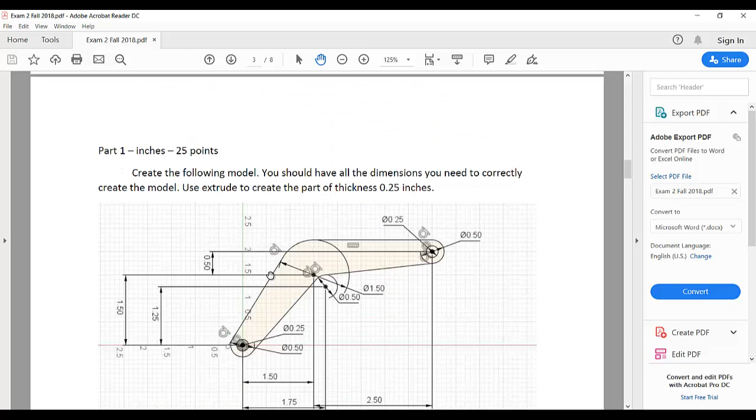So we go to part 1. Units are in inches, and it's worth 25 points. Here is the view of part 1. We need to create this design in Fusion 360.

This is part 1, the main arm, and this is part 2. Create the following model - you should have all the dimensions and create the model correctly.

So this is part 2, the secondary arm, and then there is a base. Part 3 is base, and after designing the base and saving it in Fusion 360, we will do parts 4 and 5. Create 2 pins that will be used to hold the main arm to the base and the secondary arm.

So this is the base, this is the main arm, and this is the secondary arm, and there are 2 pins. Pin 1 is here, and this is pin 2. We need to find these dimensions for these 2 pins. We can do it - first I'm going to design part 1, which is the main arm.

First thing is that verify your units. Change the units into inches. Click OK. Now the units are converted into inches.

Go to create, and I am going to select this front plane. As you see, this is the drawing. There is a circle here, then this line, then again a circle, then a line - this type of sketch we need. So I am going to draw this sketch, and then after that I will give the dimensions to it.

I am going to select circle, draw a circle like that, then again another circle like that, and I am going to select line, start the line on that circle and place it here anywhere you want, and the second line must touch this circle. Again this way I am going to select a line like that, and then give the dimension to this circle.

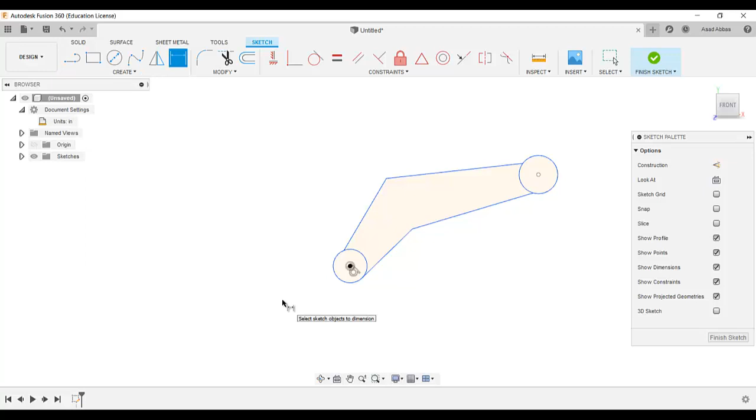Now I am going to select the sketch dimension to dimension this. The diameter is given as 0.5, and this diameter is also 0.5. Okay, and now I am going to add some constraints.

Select the tangent constraint and select this line and this circle, and again this line and this circle, and again I am going to select this line and this circle, and this line and this circle.

Now I'm going to go to modify and add 2 fillets. I'm going to select this one and this one. These 2 fillets we need to add, and the dimensions of these fillets are given.

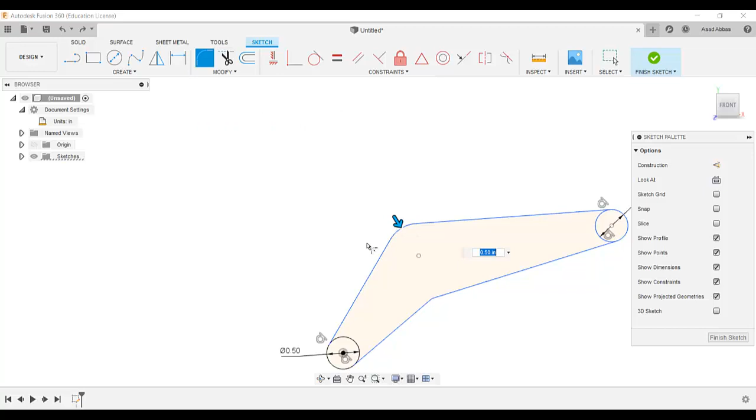This dimension is given as 1.5, and this sketch dimension - sorry, we need to select the fillet command and add a fillet here. Click OK. This is showing in radius, so we need to change it into diameter.

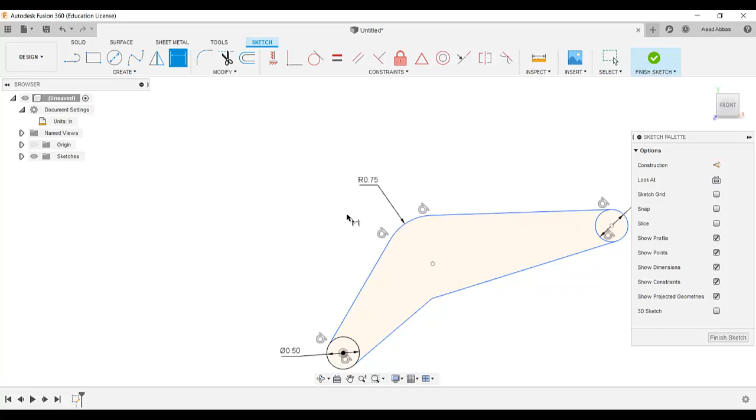Go to sketch dimension - this dimension is showing in radius form, so we need to add 0.75, and now we need to change that into diametral dimension. So go here on this dimension, select it, and then toggle to diameter. Now this dimension is converted into diameter.

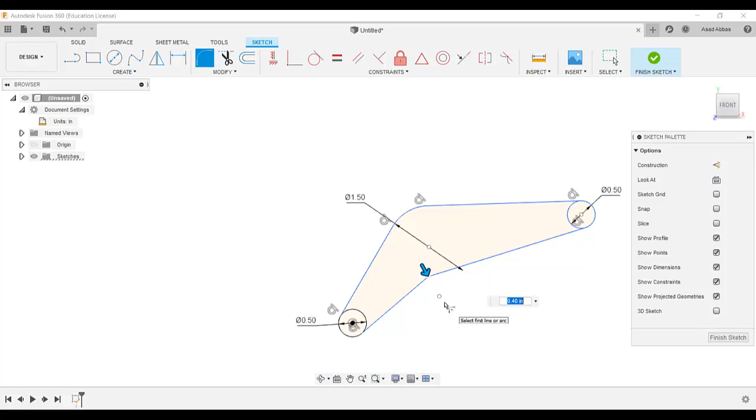Again, the same way, I am going to add a fillet here and put the dimension 0.25 in radius form, but this dimension we need in diameter. So I go here, click on it, then right click and toggle into diameter.

Now I am going to add some position dimensions. The dimensions are given here: from this point to this, and this point to this, this center point from this origin is 1.25, and this is 1.5, and from here to this center it's 1.5, from here to here it's 1.75, and this one from here to here is 2.5.

This dimension I'm going to add - from this origin, this center to this center, in vertical form, this dimension is given as 1.25. And this dimension, the center of this circle, select this point and this center, this dimension is given as 1.5.

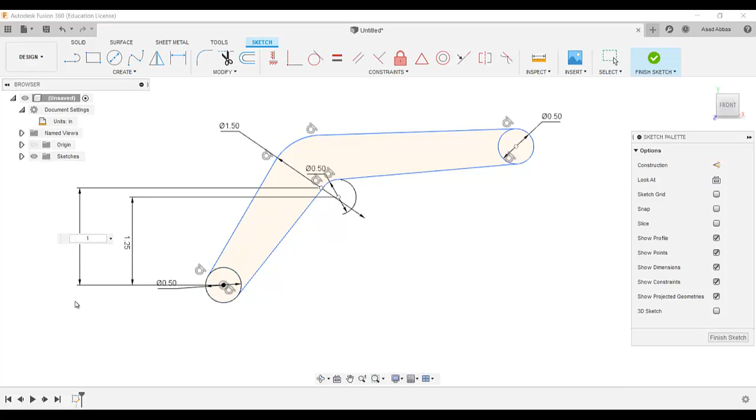From here to this center, this dimension is 1.75, and from here to here, this dimension is 1.5. Now from this point to this center of that circle, sketch dimension, select this point, and this dimension is given as 2.5.

From this center to this center it's given as 0.5. Select this one, this is given as 0.5. Now we need to add two more circles, select this, and this dimension is 0.25, and again the dimension of the circle is 0.25.

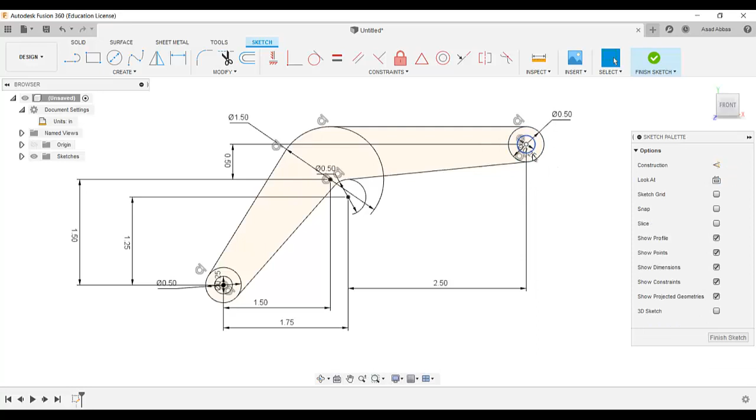We can add dimension when we're drawing the circle, or if you just draw it, we can add it by the sketch dimension. Now I am going to trim this area and this one, this area we don't need, so just select trim and go into that area and it will be trimmed, and finish the sketching.

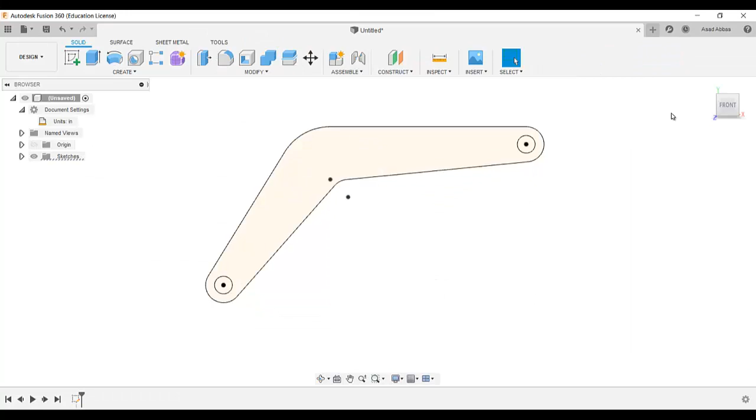To correctly use the extrude to create the part of thickness 0.25, extrude it, and its thickness is 0.25. This is the main arm. We just created the first model, and as you see, its thickness is 0.25. We needed that thickness when we calculate the length of pin 1.

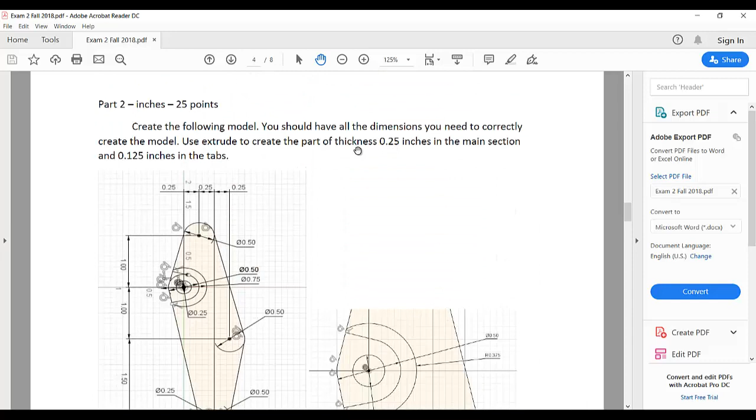The second part is to create the following model. You should have all the dimensions you need to correctly create the model. Use extrude to create the part of thickness 0.25 inches in the main section and 0.125 inches in the tabs. These tabs, their thickness is given as 0.125, and the thickness of the main part is 0.25, and there are two tabs.

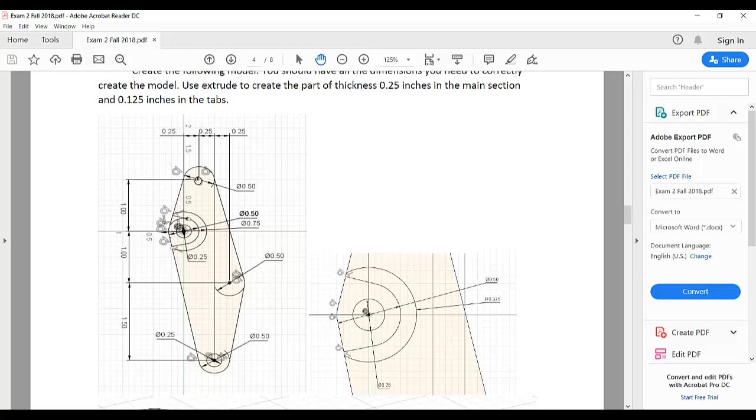The thickness of the tabs is 0.125, and as you see, for this part there is no material here. The tabs are on the upper surface and the bottom surface, and between the tabs there is no material. So this is the sketch of the secondary arm. I'm just enlarging it so you can see it.

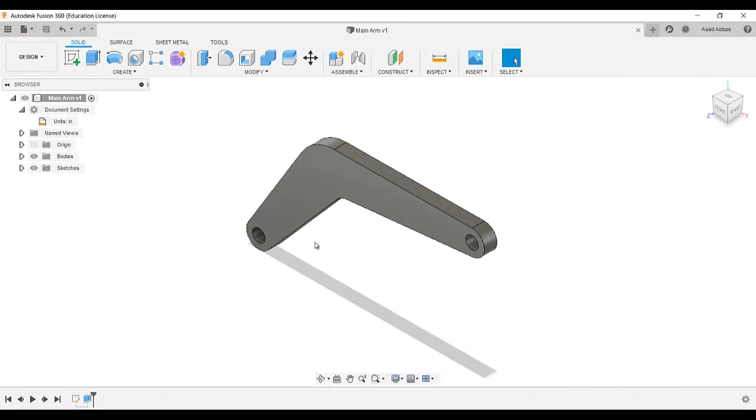Here the drawings of the tabs are given. As you see, the drawing of the tab is given here, so we need to draw like that. First I'm going to draw the main part or feature of this secondary arm, then I'm going to draw this stuff. So I just saved that part one.

First thing is go to units, change the units to inches, click OK, create, and we open this sketch on the front plane.

For this sketch I am just going to draw 4 circles, placed like that, this way. Just randomly draw these 4 circles, but make sure you draw something like that. As you see in the drawings, there is a circle here, here, here, and a bigger circle here. I'm just going to draw it like it's showing me in the sketch. So I just randomly draw 4 circles.

Now I'm going to add the dimensions. This point is the point of this circle. There is a circle here, if you enlarge it you can see it, but the other part is trimmed, so that's why it's not showing a full circle. As you see closely, there is a circle here, and the dimension of each circle we need is 0.5, 0.5, and here it's also 0.5.

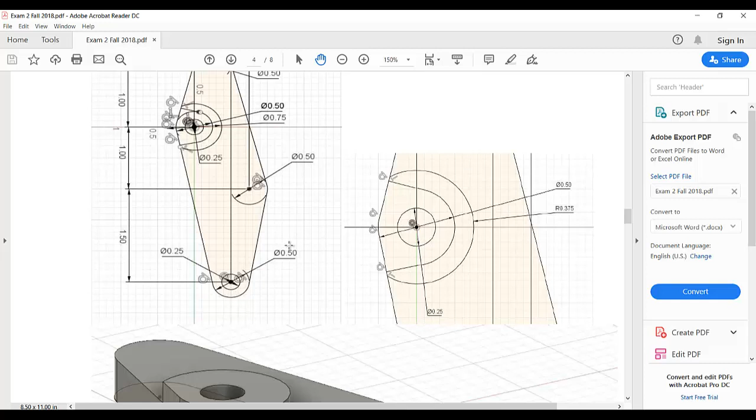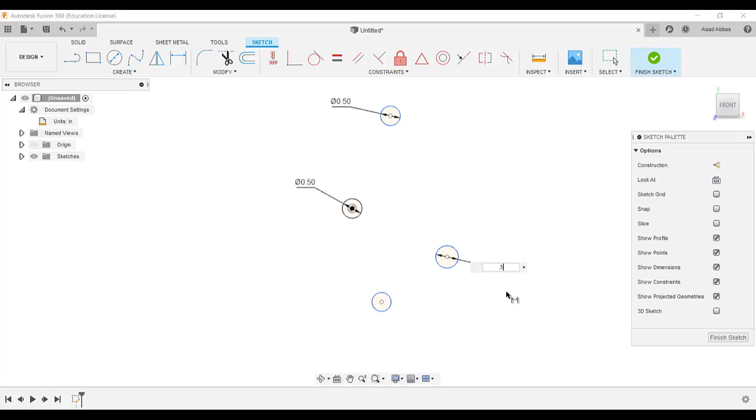Draw it and go to sketch dimension and dimension it. So this dimension is given as 0.5. This is also given as 0.5. This is also given as 0.5. This is also given as 0.5.

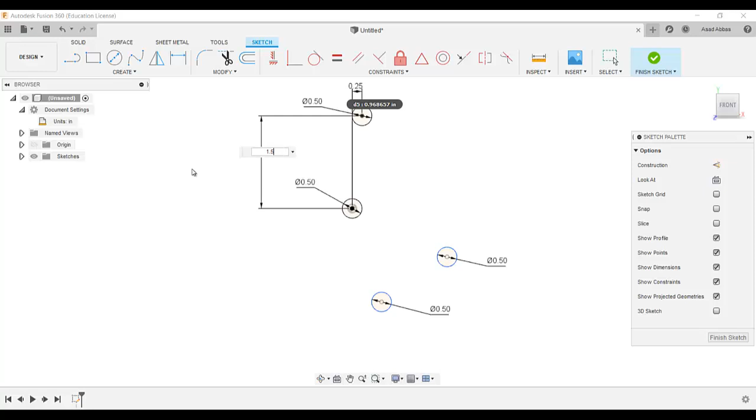So if you see from here to here, this dimension is given as 0.25, and from this point to this point, this dimension is given as 1.5, sorry, 1.

For this circle, from this point to this point, this dimension is also given as 0.5, and from this point to this point in the upward horizontal dimension, this is also 0.25, and from here to here this dimension is given as 1, and from here to here in a vertical form, this dimension is given as 1.5. So we just drew these 4 circles and gave the dimension to each circle.

Now select the line tool and draw the line from here to here. Draw a line from here to here. Draw a line from here to here. Draw a line from here to here. So we just drew these 4 lines, but I avoided adding the constraints here when I'm sketching these lines.

Now I'm going to add the tangent relation. Select this line and this circle, add a tangent. Repeat this for each line and circle combination around the sketch. So we just drew these 4 circles, gave them dimensions, added the lines, and added the tangent relation between each line and each circle.

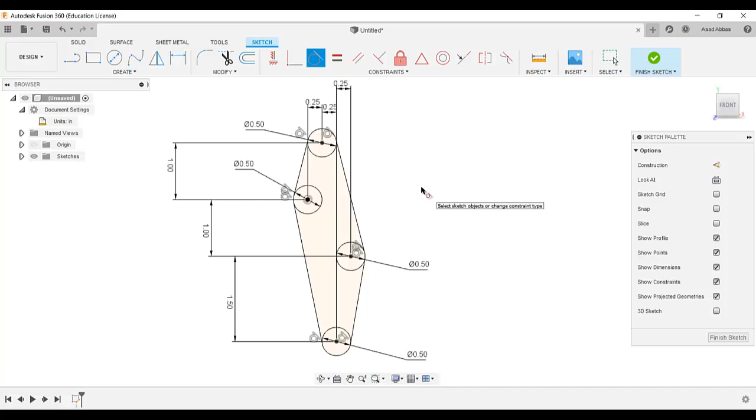So the final sketch will look like that. Now I am going to use the trim tool to remove this portion, this portion, this portion, and this portion. And I am going to select a circle here, draw a circle, and give it the dimension 0.25.

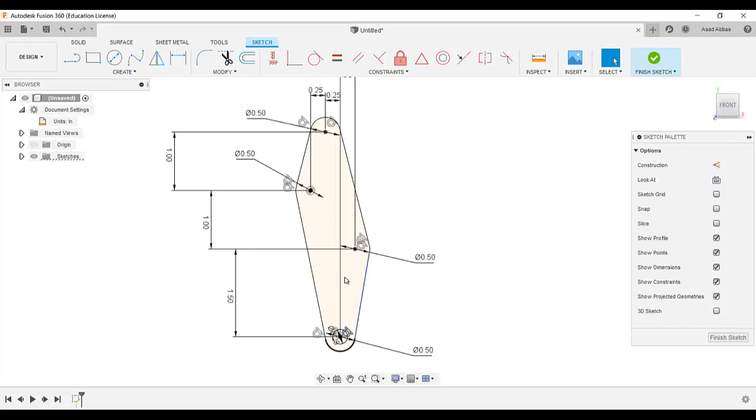We just drew this circle here, but in coming features we also need a hole here and here. So I drew a circle here which will make the hole, but I did not draw it like the circle here, so we can do it later and finish it.

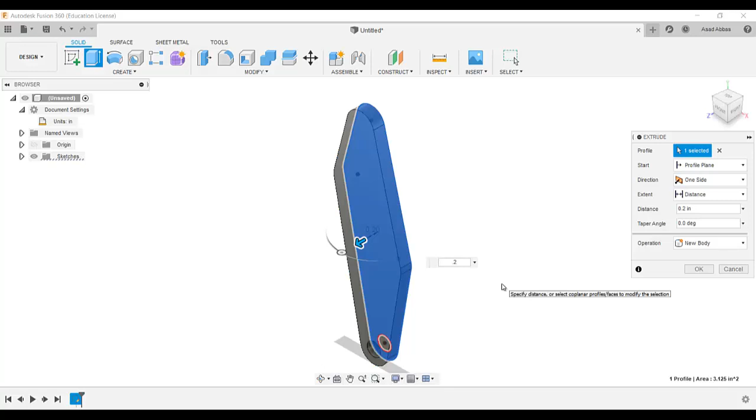And then go here and extrude it. This is given as 0.2, the thickness of this extrusion is 0.2. So we just drew it.

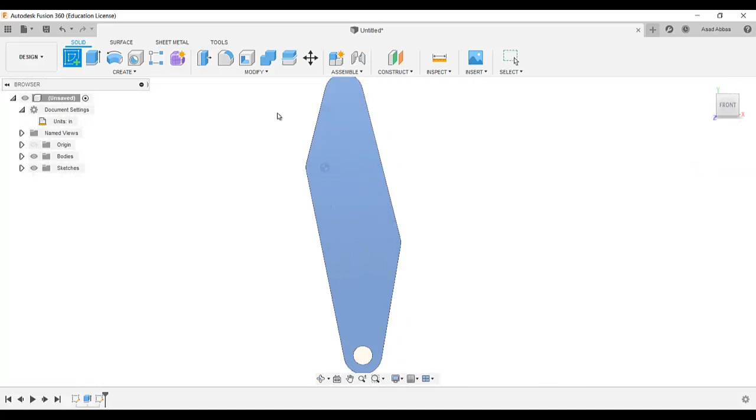Now we need to remove the material from here and add these two tabs. Look closely and observe how I am going to add it. So create the sketch on this surface, like that. Just zoom in, so this portion near the origin is in a larger shape. So we just draw this sketch.

There is a circle here with radius 0.375, and there is a circle here with diameter 0.5, and this circle is showing the diameter of the hole. So draw a circle like that, just draw these two circles.

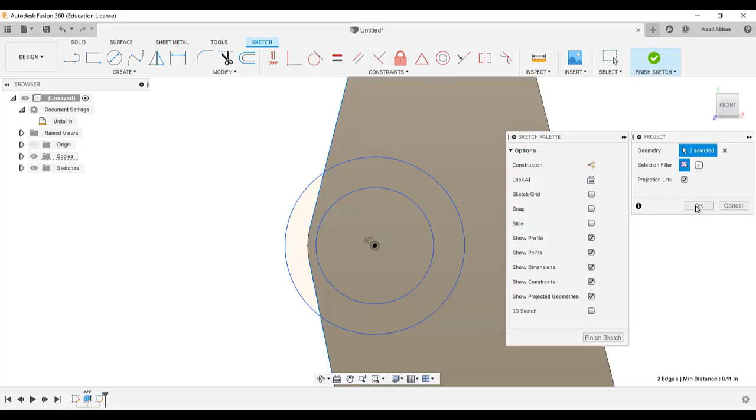Now this edge, we need to make this edge as shown in this sketch. So we want to convert this edge into a line. Go here on project, select the project tool, and I am going to select this edge and this edge and make them projected.

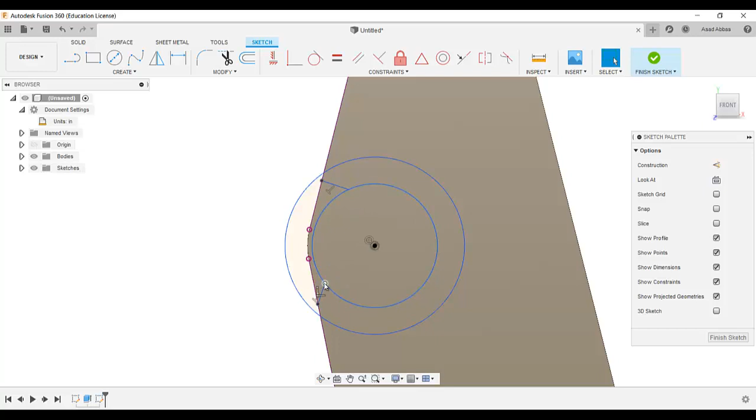So these two edges are now in the sketch form, and then I'm going to add a line like that, and again a line like that with this circle. Just remove this line like that. Now I'm going to give the dimension to this sketch.

So this dimension was given as 0.375 multiplied by 2, because the dimension is given in radius form and we want to add the diameter, so that's why I multiplied this dimension by 2. But after adding that, we can convert it into radius form.

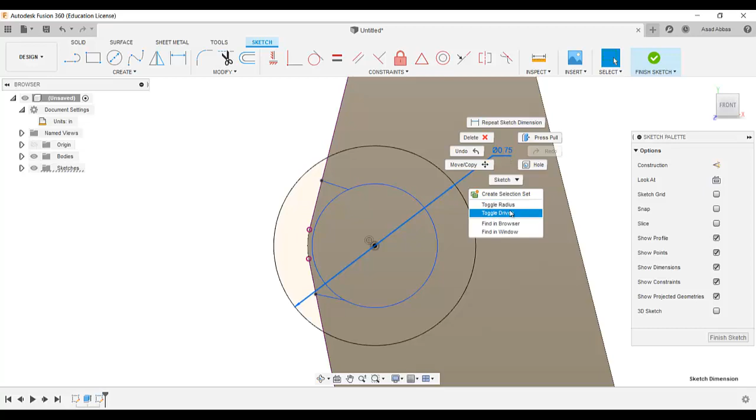So just go on this dimension, right click and toggle radius, and we know this dimension is given as 0.5 radius. So go here, create sketch dimension, and this dimension is given as 0.5 radius.

So if you observe this in the larger sketch, you see this line, there is a line like that, and there is a line like that, and the relation between this line and this line is shown by this symbol, indicating perpendicular.

So we need to add a perpendicular relation between this line and this edge, and this line and this edge. So like that, we added these perpendicular relations.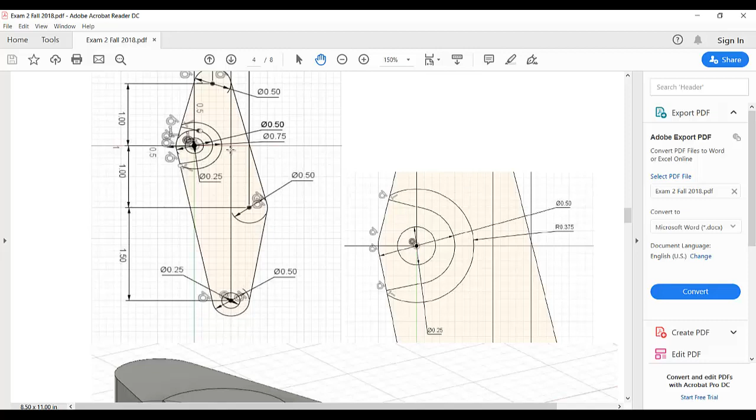Now we need to observe if there is something missing. We need to trim this portion, and if we select this portion, we need to trim this portion too. So these two portions we just trimmed. Or you can, if you don't trim these two portions, also do it without trimming them.

I think we need to add the tangent relation between these: between this line and this circle, and this line and this circle. This way we make the sketch of the tab, and we also draw the sketch to remove the material.

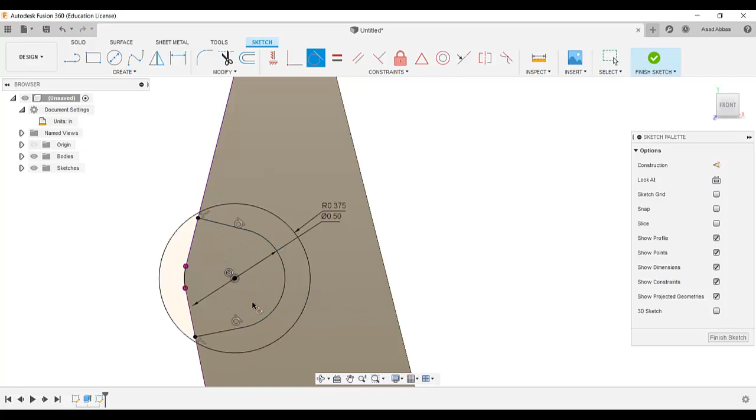So finish this and go to isometric view. Select, and make sure you select this inner portion, don't select any other portion, just make sure you selected this portion and this portion. Then select the cut tool, cut in that direction, and make sure you selected all, then make the cut.

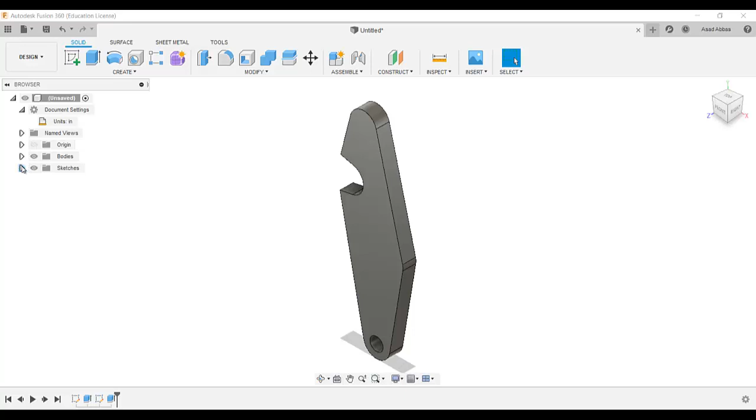So this will remove the material. Now the material is removed. Now we needed to add the tab, but as I already told you, for this sketch we added both the sketch for the tab and the sketch to remove the material.

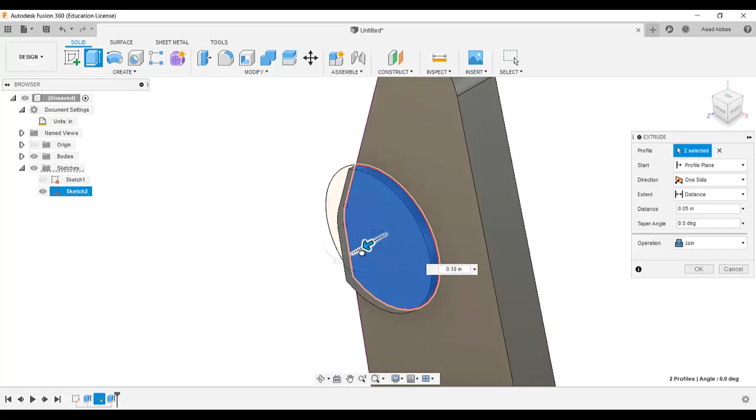Now I'm going to extrude it, and make sure this time you select this portion and this portion, these two portions you selected, and make sure you did not select this portion. We needed to select these two portions and give the dimension 0.125 in that direction.

And then we needed to make the tab on the other side, so I just rotated the model in that direction, so the other face will be shown. So click on create sketch.

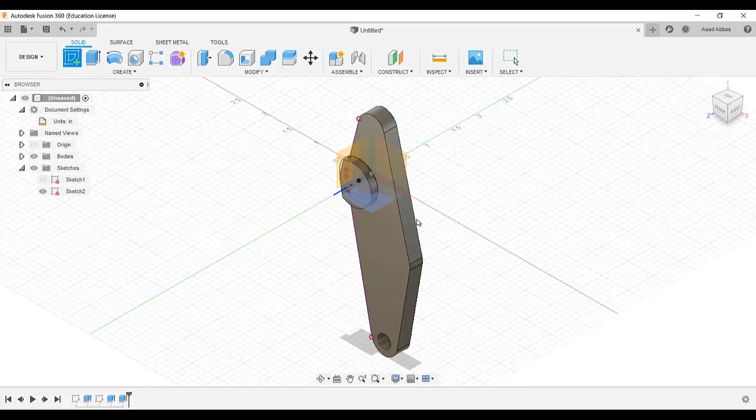Now we needed to select the other surface, so just go here and rotate it in that direction and select this portion, so our sketch will be on that surface. And we don't need to add this sketch, we will convert the existing sketch onto this surface.

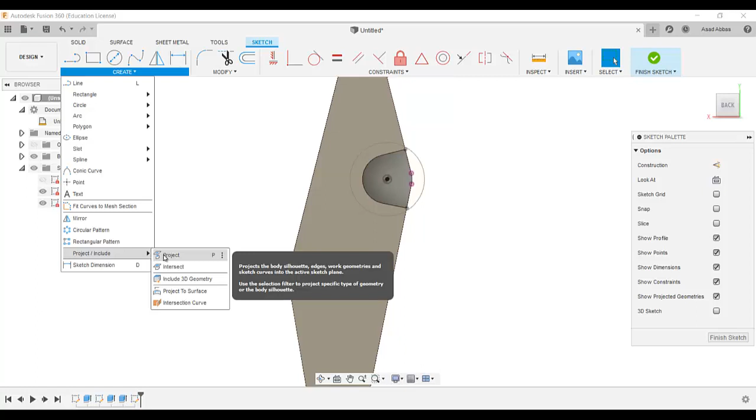So go to create and go to project, select the project, and select this circle, this line, this circle, this one, this one, this one, and this one. Make sure you select it all, so it will be converted into a sketch on our selected surface. So I just hide this sketch, so this sketch is here.

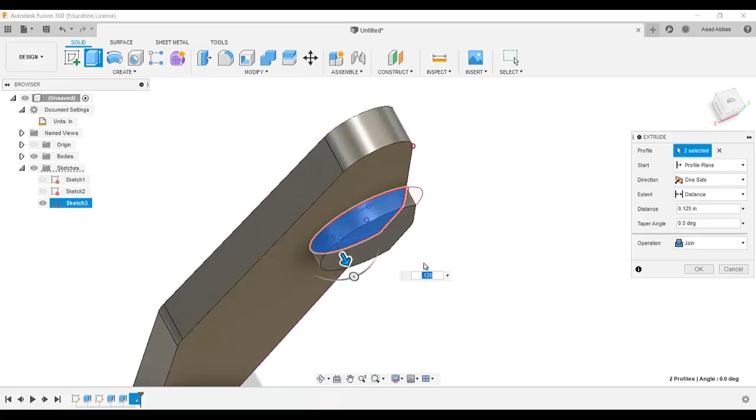We needed to extrude that. Click extrude, this portion and this portion, and give dimension 0.125. Make sure the operation is join, so it will add the material. Click OK. So we just added two tabs.

After that I am going to open the sketch on this tab and draw a circle. The diameter of the circle is 0.25. Finish the sketch and extrude.

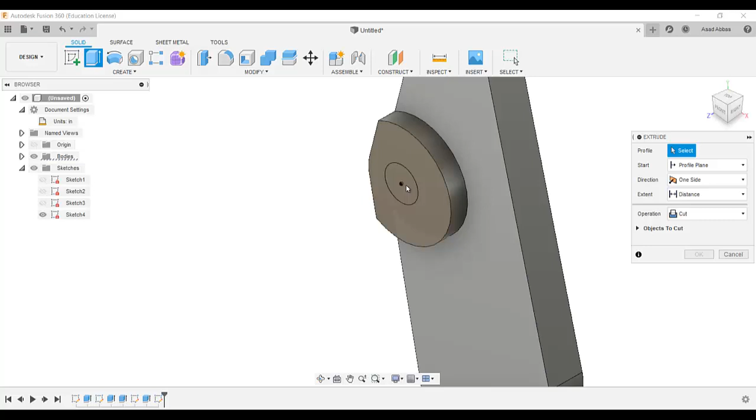Click extrude, select this hole, and make sure you select the operation as cut, because we are cutting the material. And for extent, select all and click OK. So now this is the secondary arm we just drew.

So make sure you got it how I drew it. We needed to draw the body of the main arm, secondary arm, and then we add the cut, and then we added these two tabs on it.

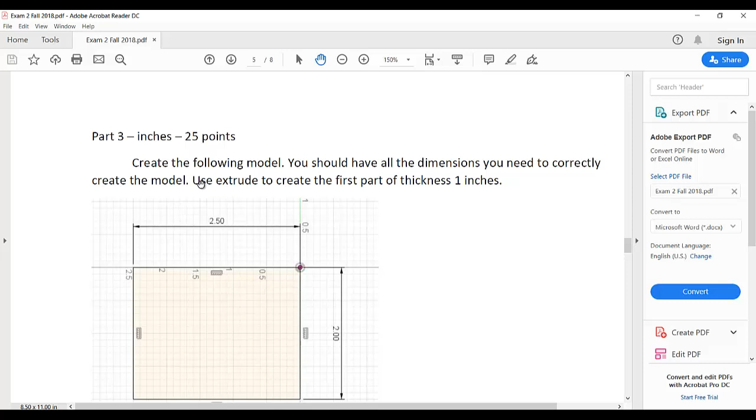Now the third part, which is the base, we needed to design. So it is saying create the following model. You should have all the dimensions. You need to correctly create the model. Use extrude to create the first part of thickness 1 inches.

So we needed to add this rectangle and then extrude it to 1 inches. Go to document settings and make sure you selected inches.

Create, and I'm going to make the sketch on this bottom plane. Select this plane, select the rectangle, draw a rectangle like that, and this dimension is given as 2.5 and 2, and then finish the sketching.

Go to extrude, and this depth of extrusion, the distance of this extrusion, is given as 1. So I just drew it.

Now it says use extrude to create the big rectangle part of 1.2 thickness, and the small square of thickness 1 inch. So there is this type of sketch here on the top surface of the rectangular, we just created it, and we needed to add this type of sketch.

I am going to add all these sketches in one go, and then we will create the extrude command to extrude all these portions.

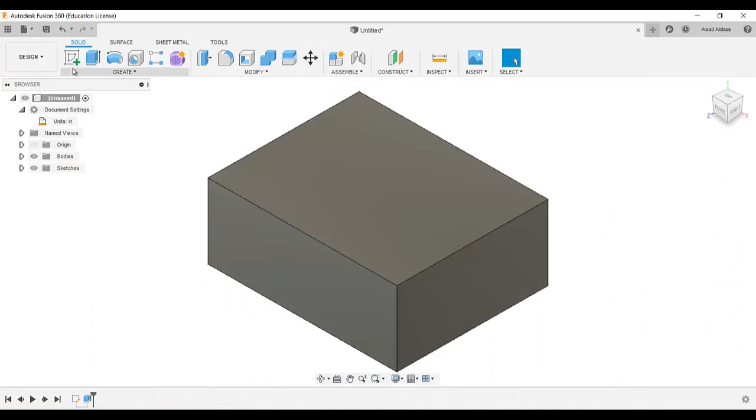Create sketch on this top surface. I am going to draw a rectangle like that, then again a rectangle like that, then two other rectangles like that, and I am going to dimension these rectangles. So it's 1.5, 1.4, and 1.

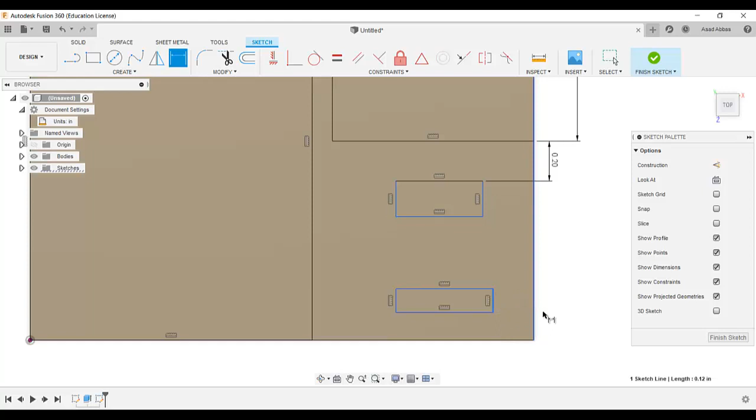So from here to here it's 0.2, from here to here it's 0.3, and this dimension is 0.5, so this dimension is 0.25. From here to here this dimension is given as 0.25, and this dimension is also given as 0.25.

And as you see, this dimension is also 0.5, and from here to here it's also 0.3. Or if you don't add this 0.3 dimension, you can add a relation called a collinear relation. So select this and these two lines, and it will make them collinear facing each other, and finish the sketch.

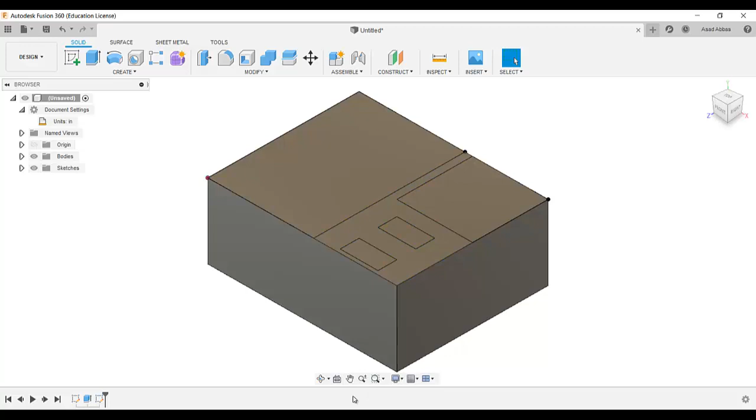Now we just added these 4 sketches here, and we needed to make the extrusion for it. So it's saying use the extrude to create the big rectangle of 1.2 inches, small square of thickness 1 inches, and small rectangle of thickness 0.5.

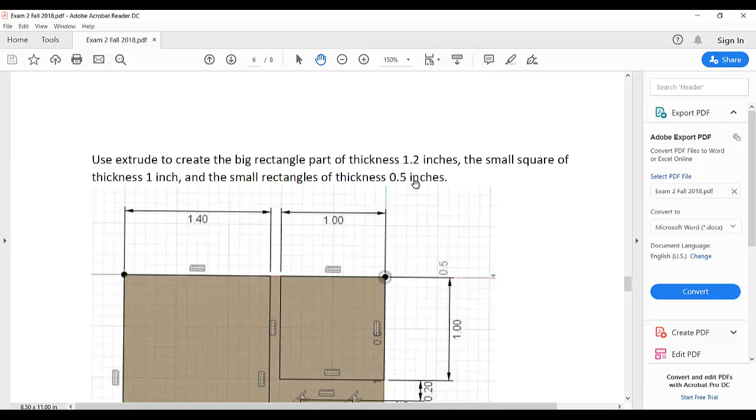So this is the bigger rectangular. We needed to add the material, using the extrude command for 1.2 inches. Then for the 1 by 1 square, we needed to add thickness of 1 inches, and then the small rectangles, these two small rectangles, are 0.5 inches.

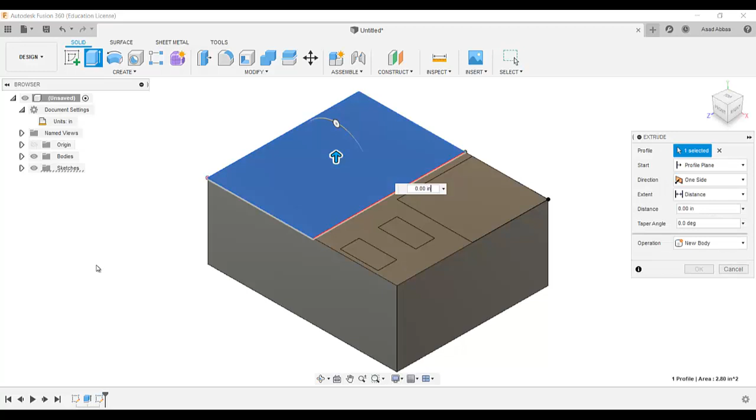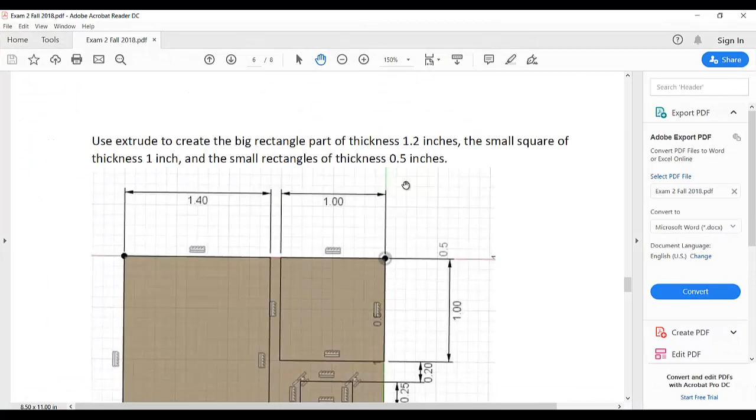So go to extrude, select this portion, only this portion, and add 1.2, click OK. Now as you perform this, the sketch will disappear. So go to this sketches folder and show this sketch, and again extrude this one, and this dimension is given as 1, and the small rectangle is 0.5... extrude this one, and this one is given as 0.5.

So then you can hide this sketch, and then we needed to add a hole here. It's 0.25, 0.25, and 0.25 inches. So create on this and add a circle like that.

Go to create sketch dimension. This dimension is given as 0.25. From here to here this dimension is 0.25, and from here to this edge its dimension is 0.25. Finish the sketching, and now we needed to make the cut starting from this surface to add the other side of this surface.

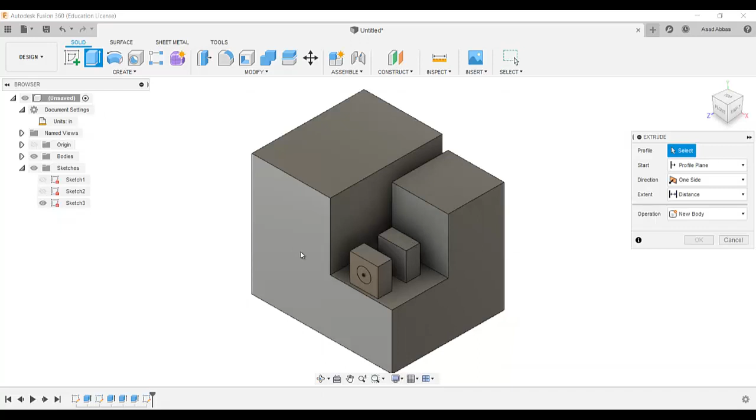So I am going to select create extrude, select this one, and I wanted to cut the material, but we needed the cut in that direction. So if you can do the cut and control this handle so it is crossing this edge but not touching this surface, you can do that, or just rotate it in that direction.

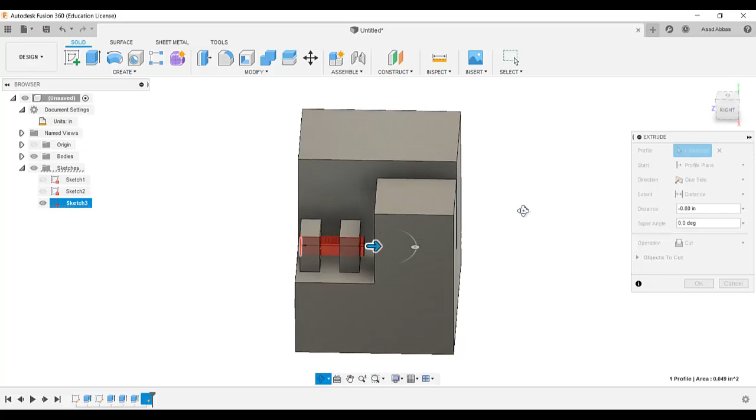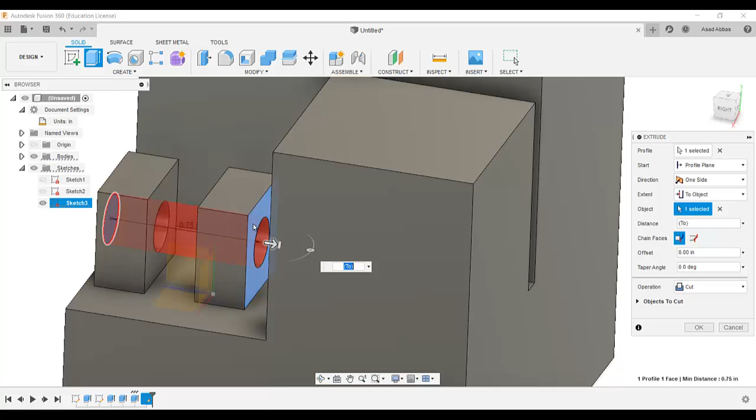You needed to see this surface, this one, and just go here on distance and select the object. It will make the cut starting from its plane to the surface or object I am selecting. So I select this surface, so the cut will be from this side to this surface. Click OK, so we draw that and click save. This is base.

Now after that we needed to add the 2 pins. As you see, this one here is pin 1. So pin 1 we needed from this side, like from here to the other side from here. So we needed to calculate the distance between this surface and this surface.

As you see, the pin needed it from this side, from here to here. So it's 0.5, 0.5, meaning 0.5, it is 0.5, and then plus 0.25 it's 0.75. So the pin 1...

Make sure you selected inches, create and select this surface and add a circle of 0.25, because the hole which we drew on the base is 0.25. Finish. Pin 1 is 0.75, length is 0.75. Pin 1, okay.

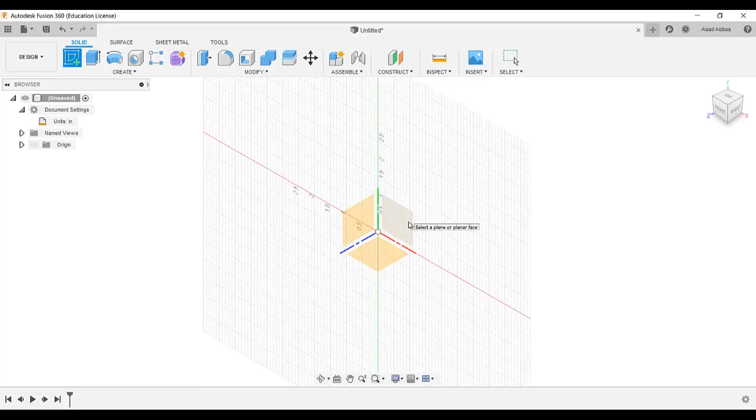Then we needed to add another pin, setting inches, okay, and this pin again on this surface, and the diameter is 0.25. Finish.

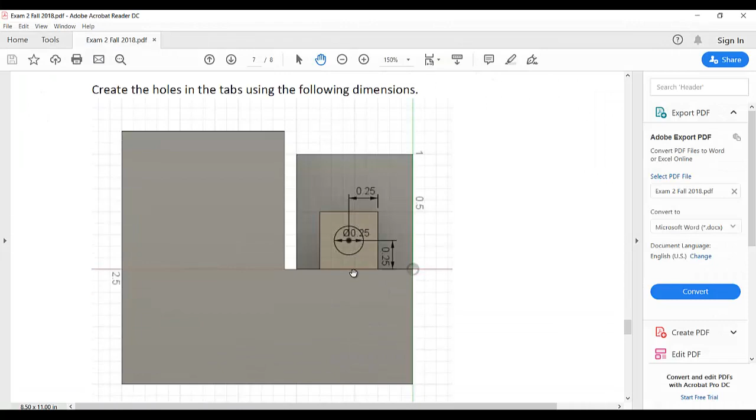Extrude, select this one, and now we needed to find the length of this pin. So this pin is pin 2, which is here, from this tab, from this surface to the other surface of the tab. As you see, the total thickness with the tabs and this portion of the main secondary arm...

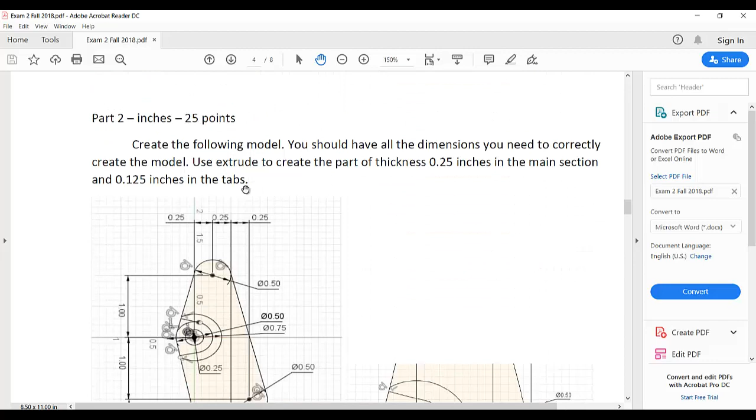This is 0.25 inches. So two tabs of 0.125 inches, plus this has from here to here 0.25. So the pin 2 length is 0.5. Save it to pin 2.

Now as you see, we needed to assemble all the components. We just created them, so we needed to assemble them. So to make the assembly, first step is that we just open a new Fusion 360 tab,

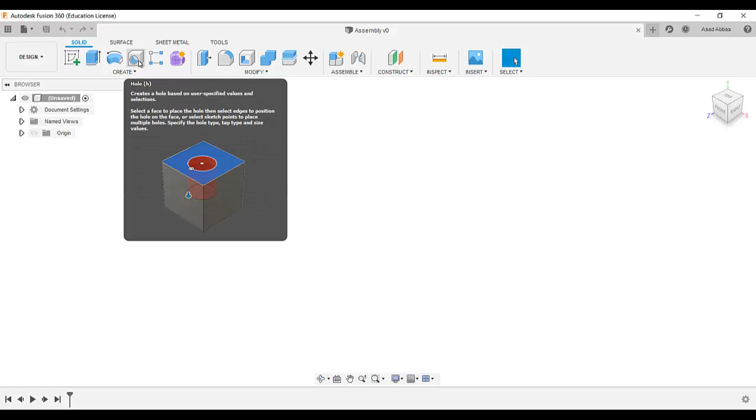and just save it. So when you expand the data panel, you will see we created base, main arm, pin 2, secondary arm. We just saved this new design tab in Fusion 360 with the name assembly. It's open, assembly is open, but nothing is showing here. So that is the way of adding the assembly. As you know, the definition of assembly is that every component is assembled together, everything is together. So that is the assembly.

So first thing is we needed to add the base. To add the base in the assembly, select this from the data panel, then right click and click on insert into current design. As you know, the current design is assembly, so this component will be moved into the assembly. And as this is a part, you will see there are 3 handles.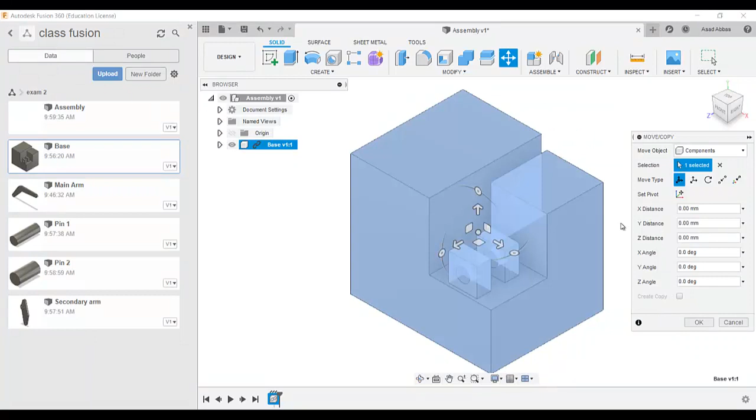These 3 handles are rotational handles, and then there are 3 other handles which are translational handles. You can move it in any direction you want by distance, and it's also showing here. In move and copy, you can see the x distance, y distance, z distance, x angle, y angle, z angle. These angles are showing with respect to the origin, but we don't need to change it for this model. It looks good, so click OK.

And as you put this model in here, you will see the base is showing here. With the assembly, you will see a base, so base is showing here. So this base, we can move it like that, we can move it. So we can move this base.

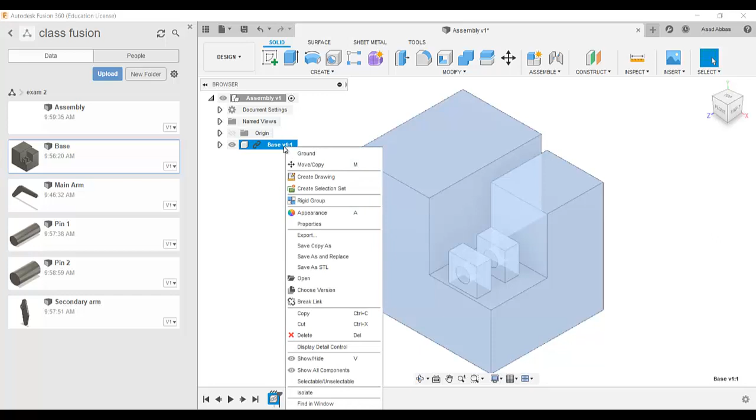So to make it fixed, go here on base, right click and select grounded. Now I cannot move it, as you see.

Now this first component, I added it, then I needed to select, click on main arm, just one click, then right click and click insert into the current design.

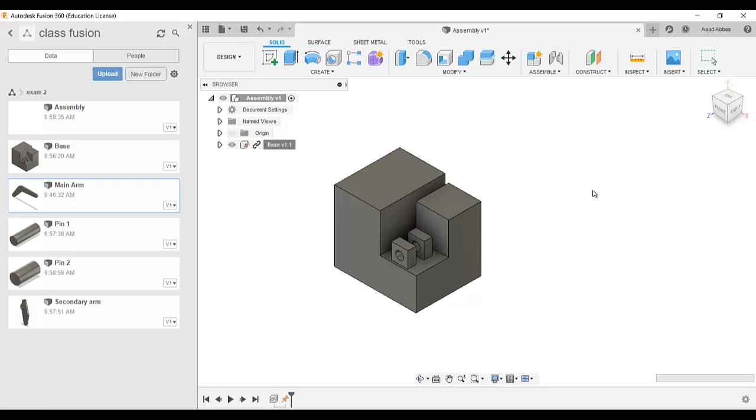So it's showing here, as you see, these two models are overlapping each other. So to give it a correct position, I can move it here. And these handles, let me show you how they work.

So as you see, this handle, I grab on it and rotate it, the model will start rotating. But for this model we don't need it. It depends on which plane you draw these stuff.

Maybe sometime you needed to make the rotation or something, so we place it here. Now I needed to go here on assembly and select the joint. The joint is the feature of the assembly which is used to make the components together or add a relation between two components, like how they are assembled to each other and how they will work. So after selecting the joint, you will see here component 1, component 2, alignment and motion.

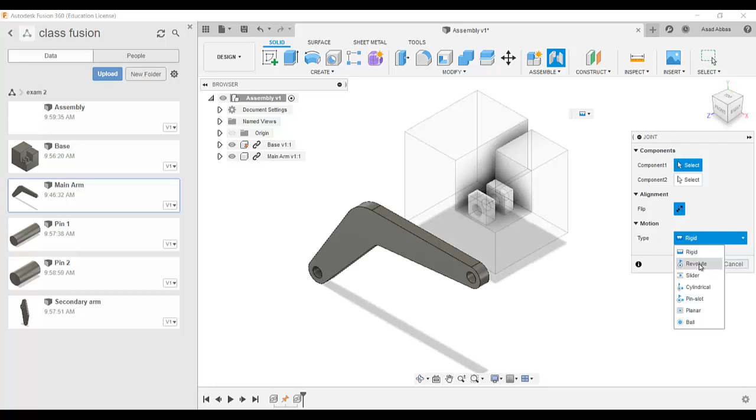So for the motion, I am going to select the revolute. So select this one, and then for component 1, I am going to select this edge. After selecting this edge, a plus sign is showing here in the middle of this center, this circle.

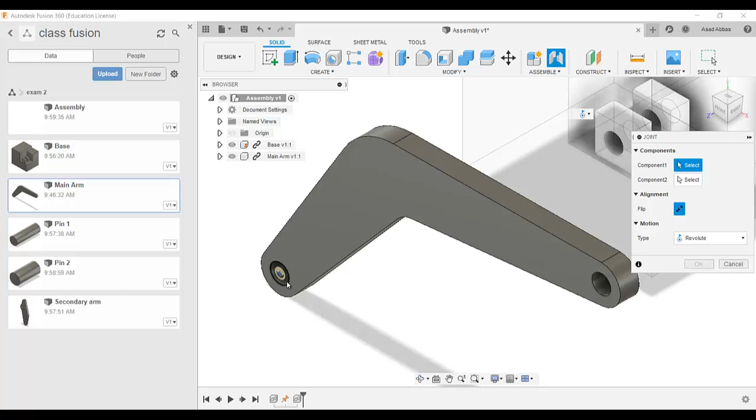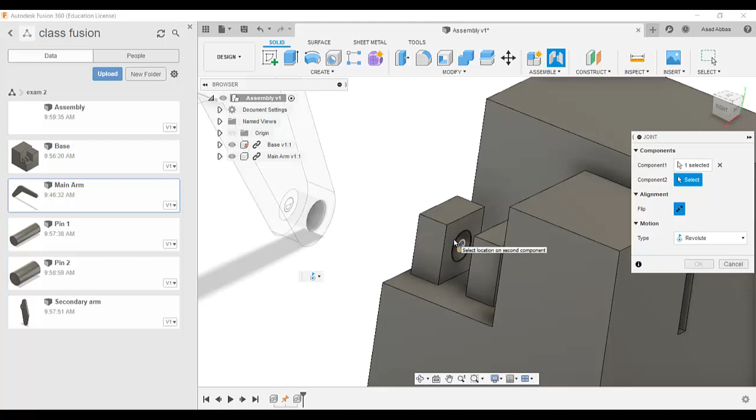So that means for this joint, this is component 1, and from this surface it will be attached to the other component, so component 2 is this one. We just selected the other component for this edge. So now this edge is touching this edge, and as we added the revolute relation between them, that's why it starts rotating and showing us a preview of how it will act in the assembly.

So like that, now we just added these components, and we added the joints between them. Now we can rotate this model, but we cannot move it in any direction, because the first model base is grounded, meaning it cannot move. And this model, we added the revolute relation between the circle of two components, so that way it's just rotating, it's not moving in any other direction.

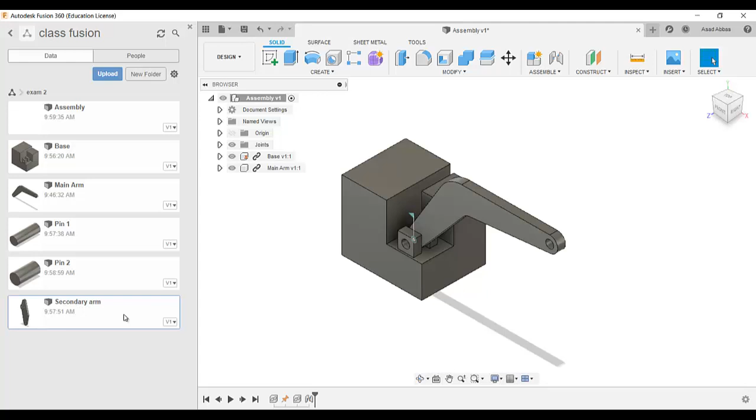Now we needed to add this secondary arm. So select the secondary arm, then right click and select insert into current design. So as you see, it will be showing here. I just grab this handle and move it here like that and click OK.

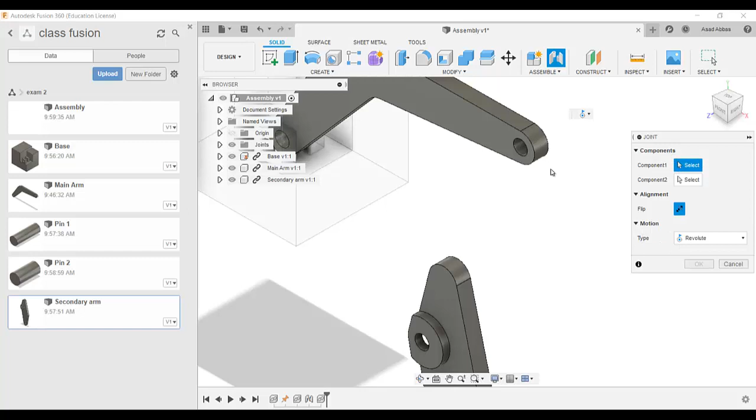Now I am going to again add joint, select the joint, and then for the motion type we needed the revolved, and for component 1 I am going to create a component origin on this point. Select this circle, it will create an origin like that, and then for this part just zoom it, and if you needed to rotate you can rotate it. Just rotate like that, because we needed to make another origin for the components too.

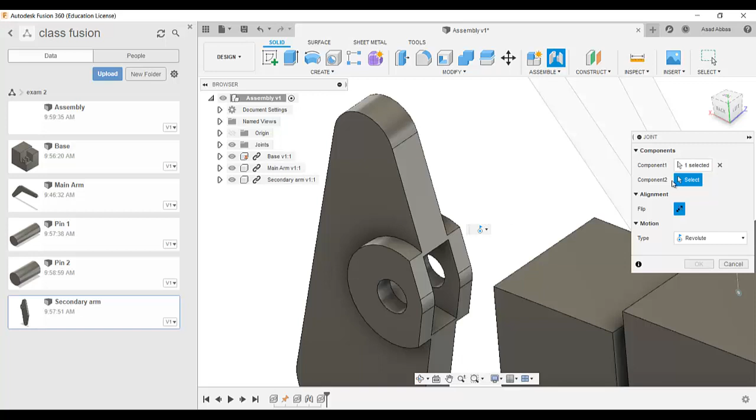So this circle I just selected it and click OK, and it will be assembled and showing the preview of the revolved, and click OK like that. Now you see the motion like that.

So for this project maybe you needed to show this motion, so make sure you edit these things correctly, because he will see the motion acting, and the grade will be based on that motion. If this motion is existing you will get the grade, if not, you will not get the grade. So this motion you needed to show him, and then we needed to add the pins.

So select this pin and click on insert into this design, and I'm just going to grab this handle and make sure the pin is here. It will be easy for us. And then go to joint and continue.

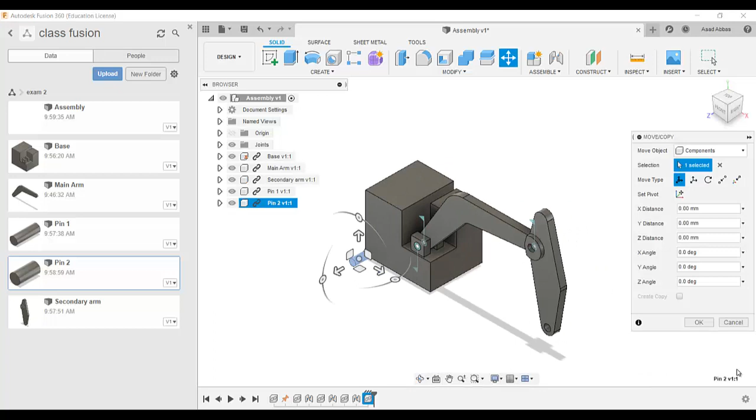And then we needed to add the pin 2. Click OK. Join this edge and this edge.

Make sure you selected the correct edges, because whichever edge you selected, it will create an origin, and for the other component it will also create the origin, and these two origins will be coincident. So that's why you needed to take some care.

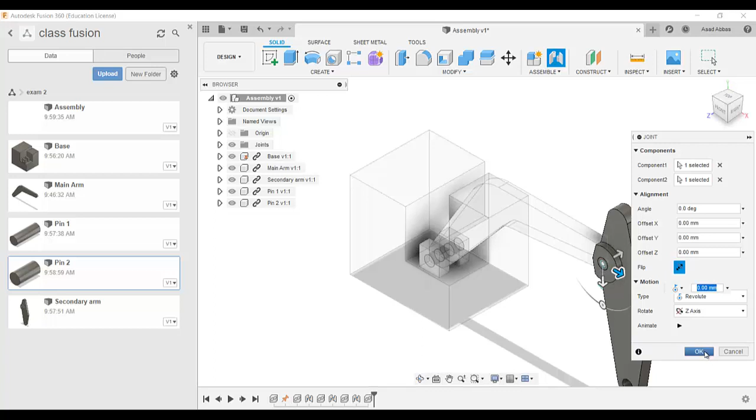So now this is done, and you can see this motion here, or you can also see the motion like that.

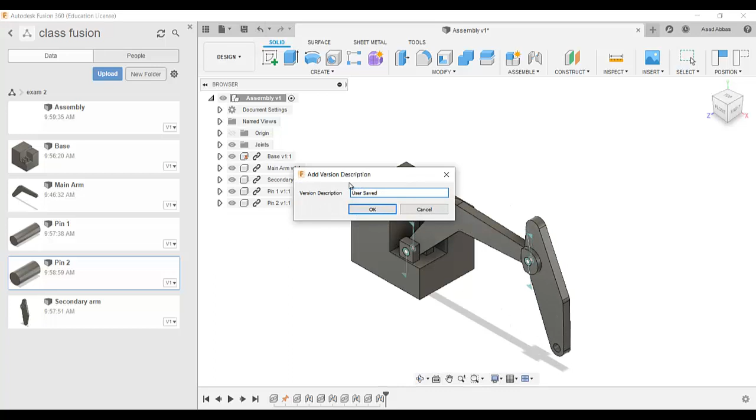So this is done. You can click save, and you can also export this to your laptop. Just go here, export, and you can select the position on your laptop where you want it, and you can export it also. So this model is done.